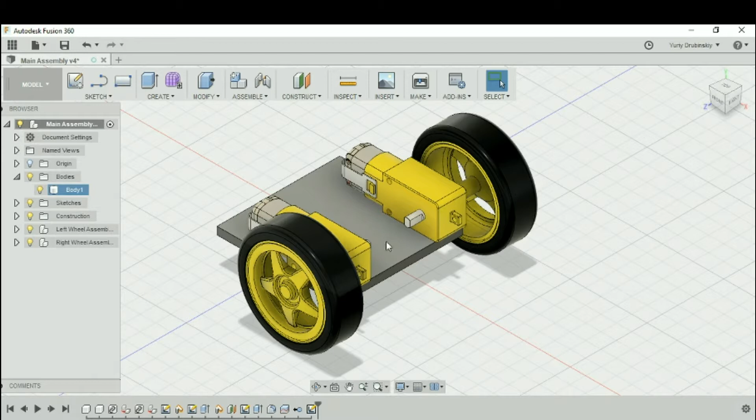So let's begin by constructing a plane. We're going to make an offset plane off of this face of the motor. Let's click on it and make it 2 millimeters away from the motor. So let's type in 2 and hit OK.

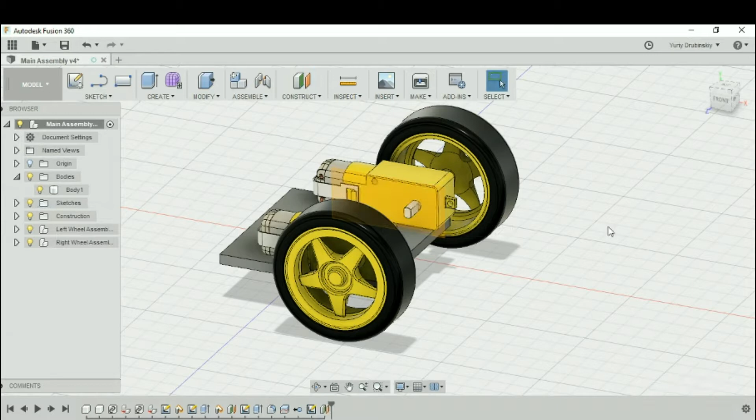Let's also turn off the right wheel assembly by hitting the light bulb so we can get a better look at what we're designing. So we'll look at it from the front.

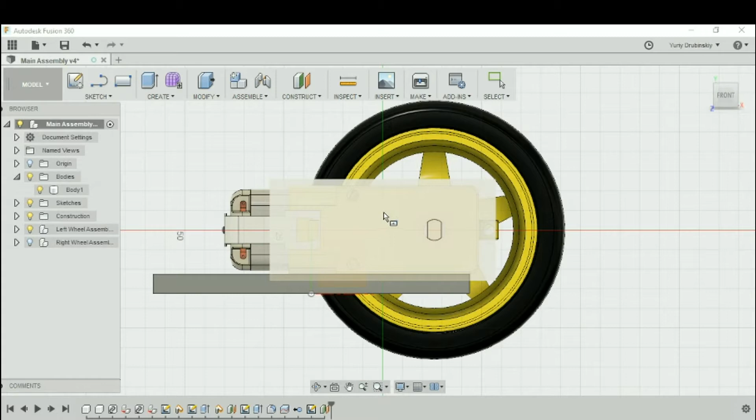Let's create a rectangle from the plane we constructed. We'll go to Sketch, Rectangle, and make a center rectangle. Let's click on the plane - you'll see it turn white. Let's construct a rectangle by finding the center of the circle, and you'll know it's the center when you get that square with a circle in the middle. So let's make a rectangle about 5 millimeters by 5 millimeters.

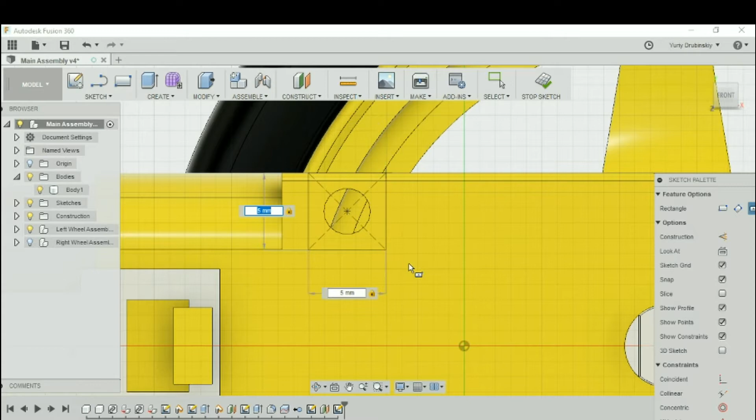Let's type in 5, hit Tab, type in 5 again, and hit Tab. That locks our rectangle into place so we can't change its dimensions. Let's click - so we got a rectangle, more of a square, that's 5 millimeters by 5 millimeters.

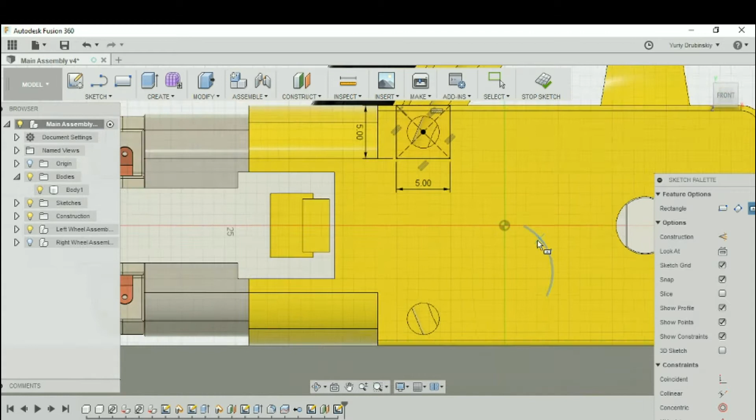So now that we have that, let's create a line. Let's get the front view and create a line that extends down to the platform. We'll go to Sketch and hit Line, or just hit L on the keyboard. We'll go to Line, hit the corner, and extend this line down to the platform.

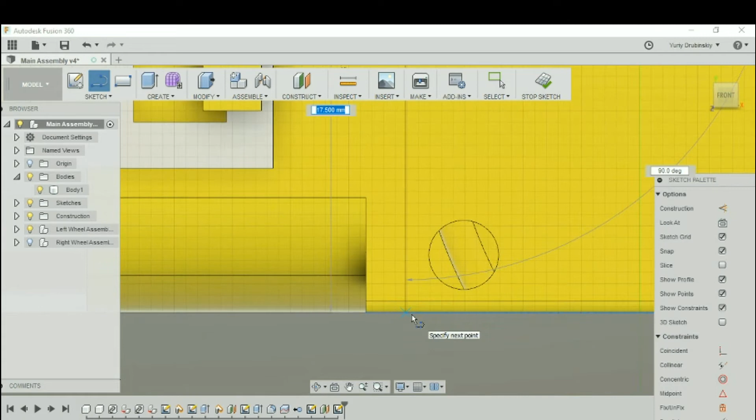A few things I want to check for. One thing I want to make sure of is that this line is 90 degrees relative to where I started, and you can see that it is. Then I want to make sure it connects to the platform, and I can see there's an X, which means the line is going to intersect with the platform.

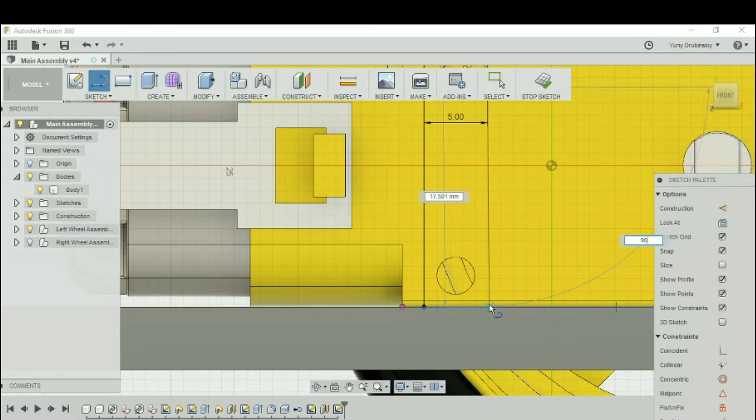So let's click, and let's do the same thing on the other side of the square. Click, and we'll extend the line down to the platform. We'll make sure it's 90 degrees. If we're not sure or can't get it close to 90 degrees, we can always hit Tab and type in 90, then hit Tab, and that locks it into place. So if we click, when we see the X, now we have a line.

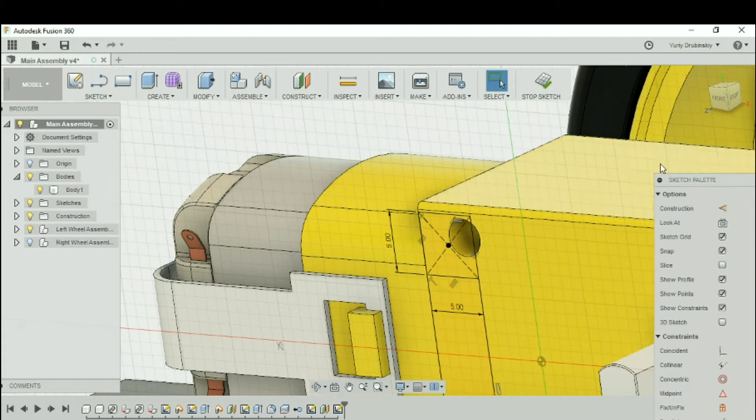Let's hit Escape. Now what we want to do is make sure there's a hole that corresponds to the hole on the motor, so we can get the screw through and tighten it around the motor mount we're designing. In order to do that, let's go to Sketch, go to Project, and click on Project.

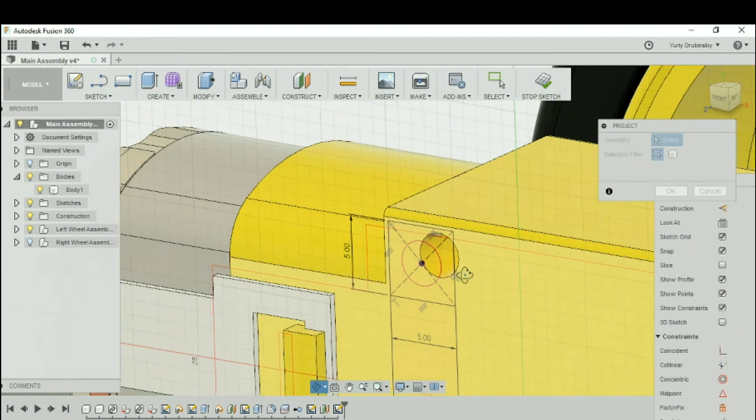What we're going to do is project the circle onto this plane, and you can see it already did it for us. But if it didn't, we can just click on the circle and hit OK. You can see there's an outline of the circle onto that plane we constructed. So let's hit Stop Sketch.

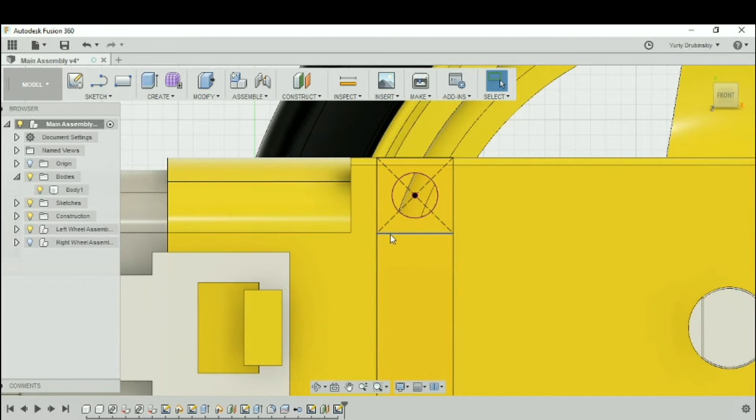Again, let's click on the view cube so we can keep looking at it from the front. And we're going to extrude this out now. So we can either hit E on the keyboard, or go to Create and Extrude. What we're going to extrude is this part.

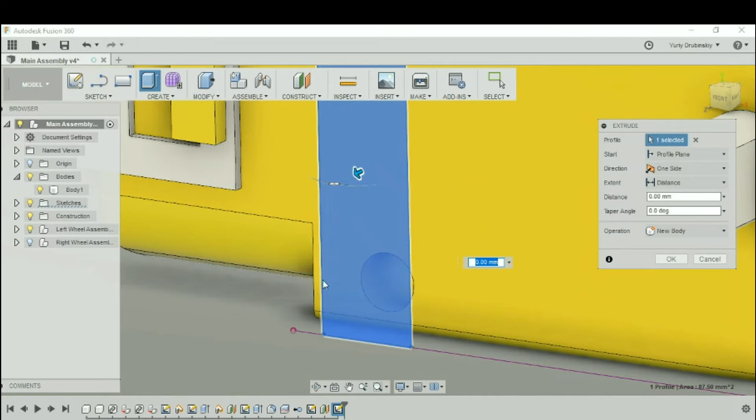Actually, before we extrude this, let's make sure we also get the bottom mounting hole incorporated into the plane, or else we won't have space to get a screw in through here. So let's hit Cancel. Let's go back into Sketch and continue creating the sketch on what we've already been working with. You can see if you highlight this, the old sketch kind of turns gray, and that's what we want. Let's click.

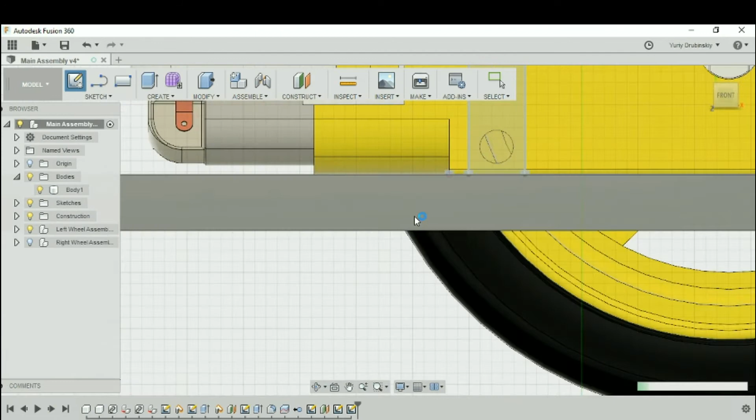And let's repeat the process of projecting it again. We'll go to Sketch, Project, and Project. Let's select the circle and hit OK. So now we have two circles for the mounting holes, the bottom one and the top one.

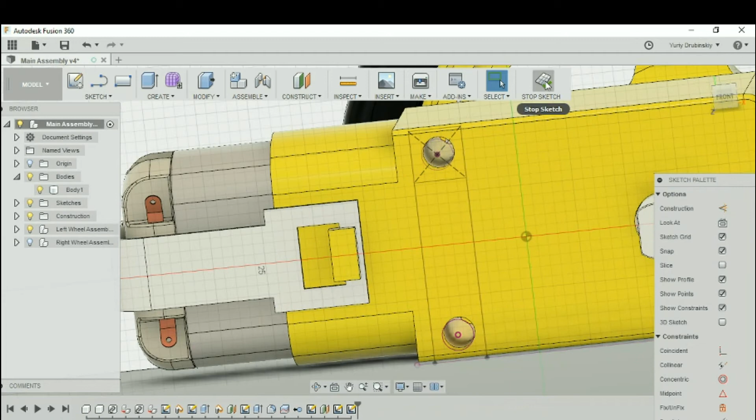Now we can hit Stop Sketch, and let's go back to Extrude. Again, it's under Create and Extrude, and what we're extruding is - let's hit Cancel, let's go back to Extrude. What we're extruding is the rectangle and the top rectangle.

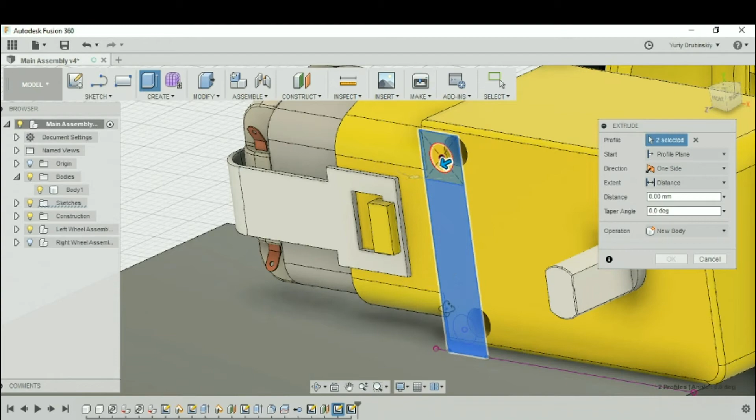Doesn't look like the bottom mounting hole is selected, but let's try to extrude anyway, and we'll see if we can go back and fix the problem. Let's try to extrude it about 4 millimeters, so we'll type in 4.

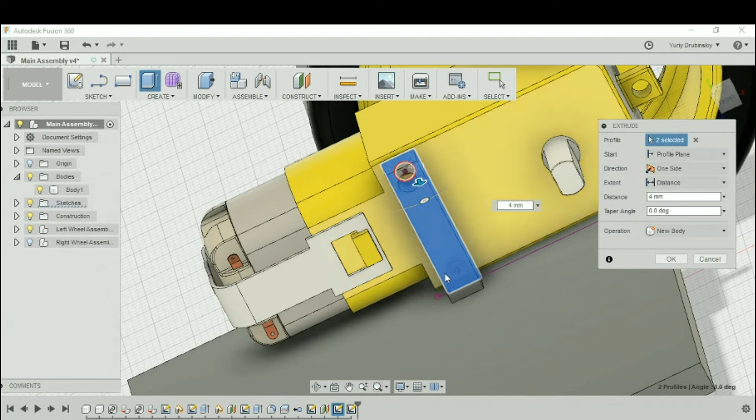Under the operation, what we want is a join, and what join does is it joins the mounting bracket to the platform. The other option is new body, which would create a separate body for the mounting bracket, so I could move it or resize it more easily. But in this case I'm more interested in making this one solid body, so we're going to make it a join, and let's hit OK.

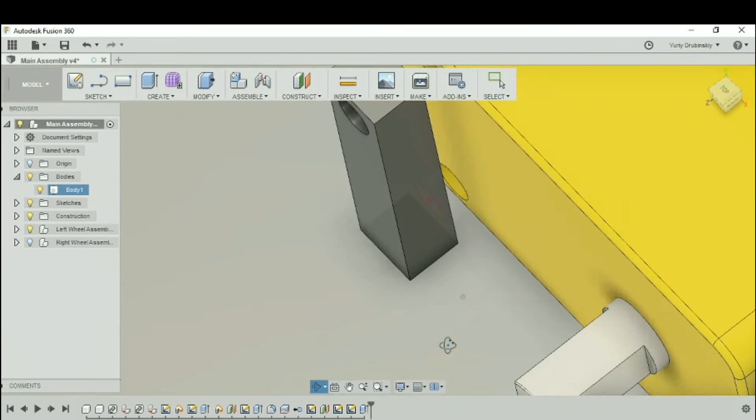You can see the top hole got incorporated okay. Let's see if we can get the bottom hole as well. Let's try to rotate to the back, and let's turn off the left wheel assembly for a moment so we can rotate to the back of this mounting bracket and select it.

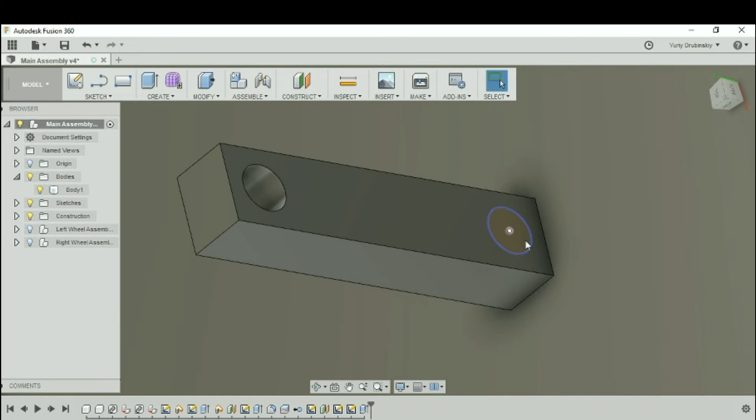Looks like there's a sketch getting in the way, so we can right click and hide that. Let's hit escape. Let's see if we can select this hole, and it looks like it's selectable.

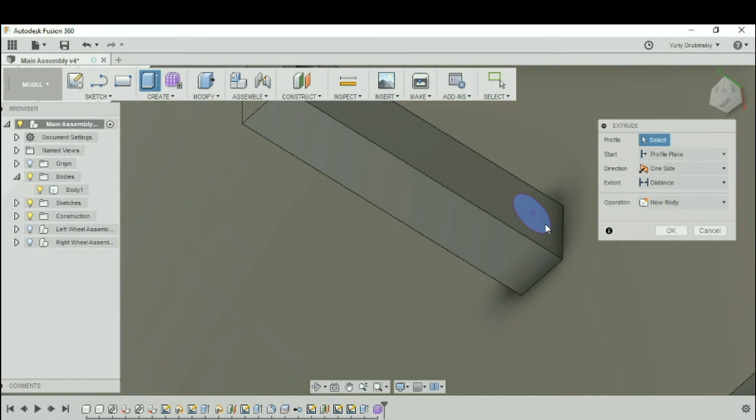In order to make the bottom hole for the screw, we're going to hit extrude. We can either hit the E hotkey or go to create, create and extrude, and extrude this through the mounting bracket. You can see it turns red because it's going to be cutting through it, and by default the operation becomes a cut. Let's hit OK, and let's turn the left wheel assembly back on.

Now you can see, if we zoom out a little bit, that we have both of the holes incorporated.

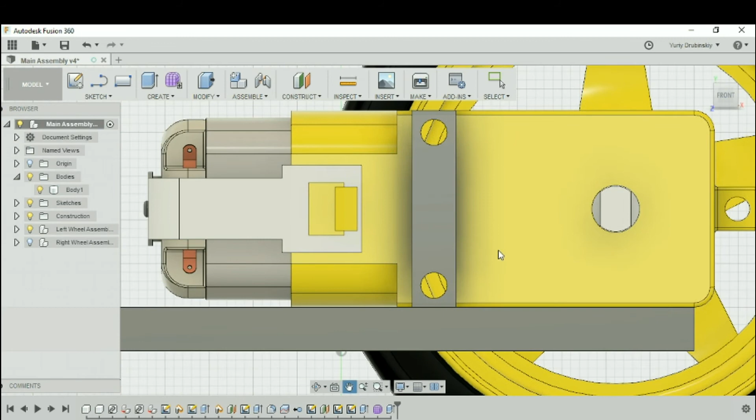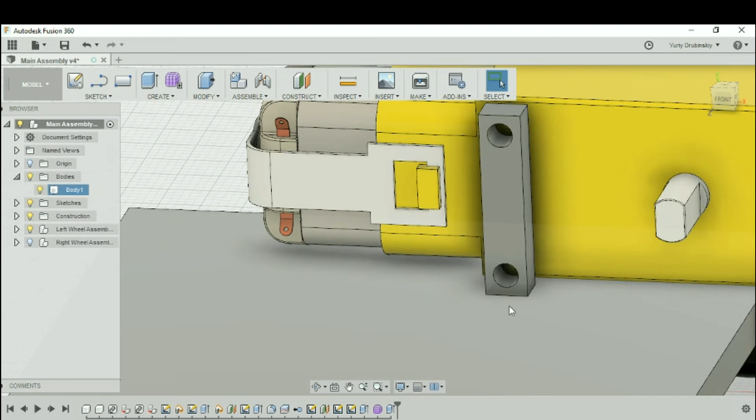One other thing to watch out for, since we've got a tall mounting bracket, this bottom part where it joins the plate might be a weak point. When we 3D print it, there's a chance it could snap if the robot runs into a wall or another robot.

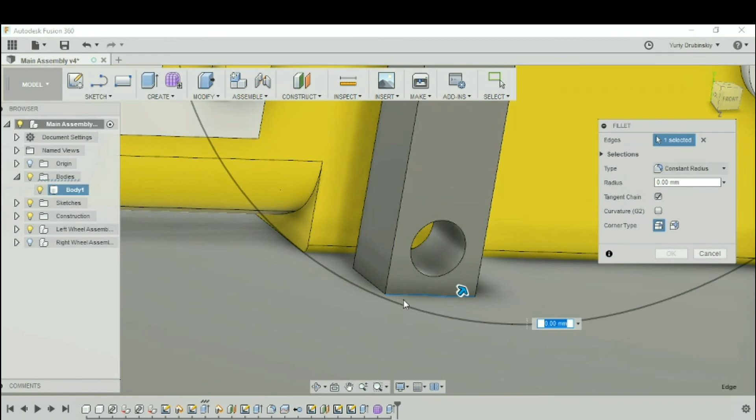So let's try to make this more structurally sound by adding a fillet. To do that, we go to Modify and hit Fillet. Let's select a couple lines - this line, then hold Control and select this line on the corners and the other line on the corners - and we'll try a fillet of 1 millimeter. You can see it adds a fillet that gives the bottom of this mounting plate a bit more structure to attach to.

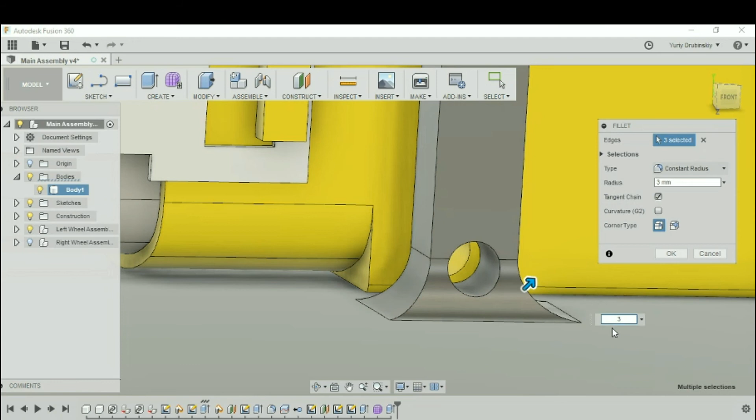If I experiment with something, I can try maybe 1.5, and it gives a thicker fillet. One thing to watch out for: if I make it too big, say 3 millimeters, when I get the screw through I might have an issue getting it secured enough because of that curve. So I think 1 to 1.5 is a pretty good size. I'm going to choose 1.2, and that looks okay, so I'll hit OK.

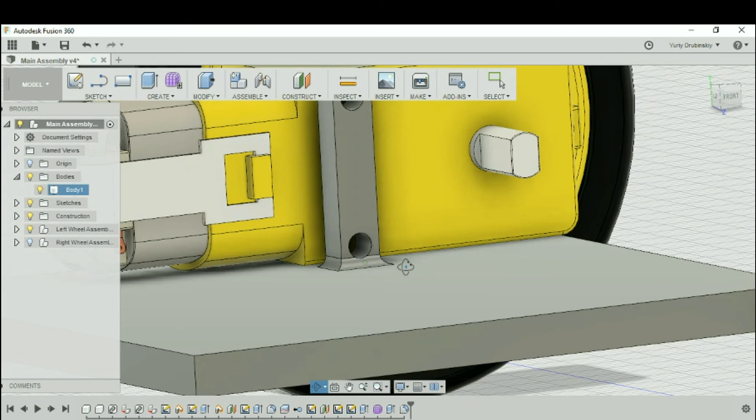So now I have the bottom mounting plate and a mounting bracket for the motor to attach to. I can see in my browser window that I still have just one body, so I know the mounting bracket and the plate are all one thing, and I can turn it off and on as needed.

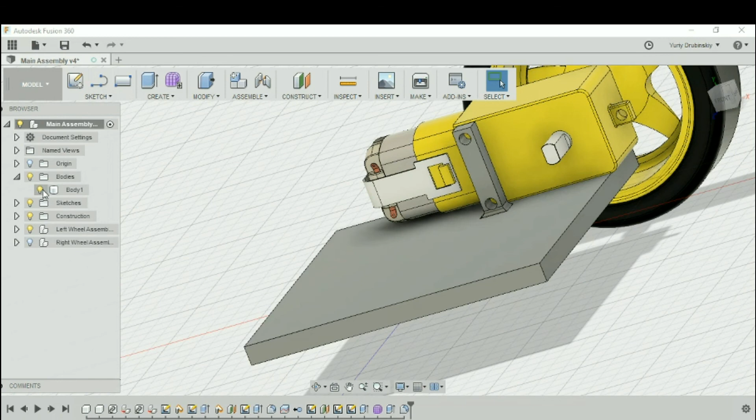Then I can repeat the same process - turn off my left wheel assembly, turn on my right wheel assembly, and easily repeat the same process on the right wheel.